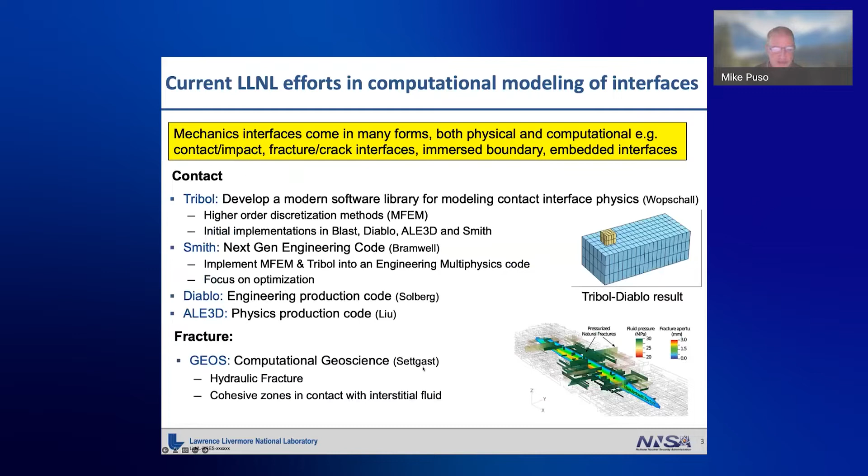One of our earlier immersed boundary codes was coupling our hydrocode Paradyn to Gemini, which is a Navy code, and there they use finite volumes in the background and then structural shells, and they're modeling blasts on ships.

The current thing over the last 12 years or so is we now have a production version of FEusion that has been used quite a bit over the last few years. It couples ALE3D, Paradyn, and the SPH code Spheral, and that uses cut cells in the background and couples with Lagrange multipliers, and I'll talk more in detail about that.

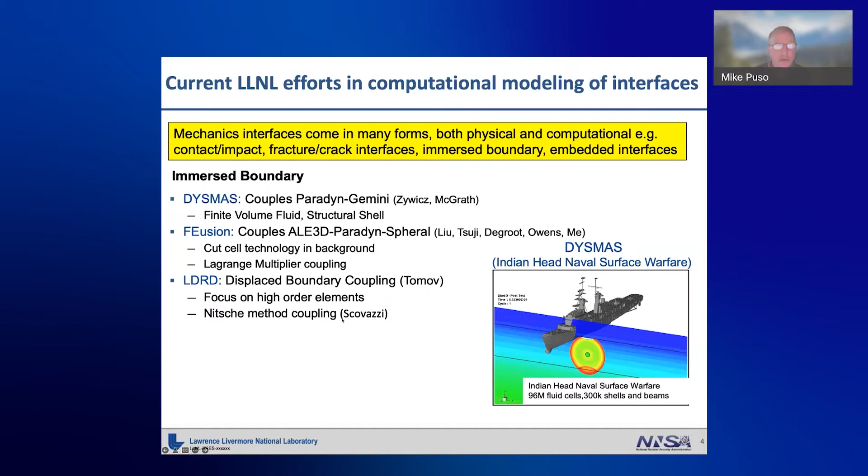Then there's an LDRD that's using this displaced boundary method that was developed by Guglielmo Scovazzi from Duke. The FEusion stuff in particular, we're interested in modeling like fracture or fragmentation.

So you have a blast going off. This is a grenade model by Chad Noble, and the HE gases basically project the fragments out, and you get a lot of contact with the fragments and so on.

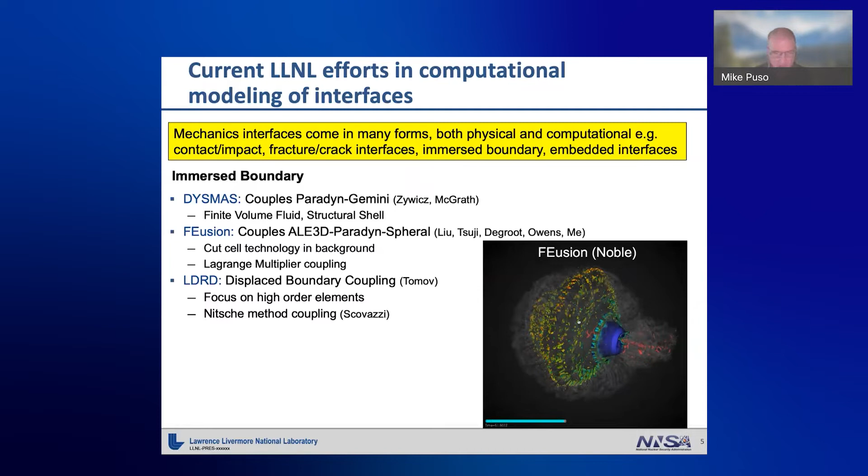With these interface methods, you have to come up with some sort of traction to enforce some displacement or velocity constraint at the boundary. There's three basic flavors for that: a penalty or a Nitsche method, or Lagrange multipliers, which we'll talk about today, which for a variety of reasons I like better than penalty, but I think more can be done there in the Nitsche world.

So in FEusion, we use these multipliers, but then you have to incorporate advection, and we're extended to SPH, and I'll go into some more detail about that.

The flavor of the day for contact, for a variety of reasons, because it's very smooth and has really nice behavior, is this Mortar contact. Unfortunately, it's biased. You have to choose a side, so you can't do self-contact problems. But we implemented two passes, and then we have to stabilize it.

So I'll talk a little bit more about that. Whenever you have contact gaps opening and closing, in an implicit time integrator in particular, it'll drive it crazy and go unstable if you don't do something special.

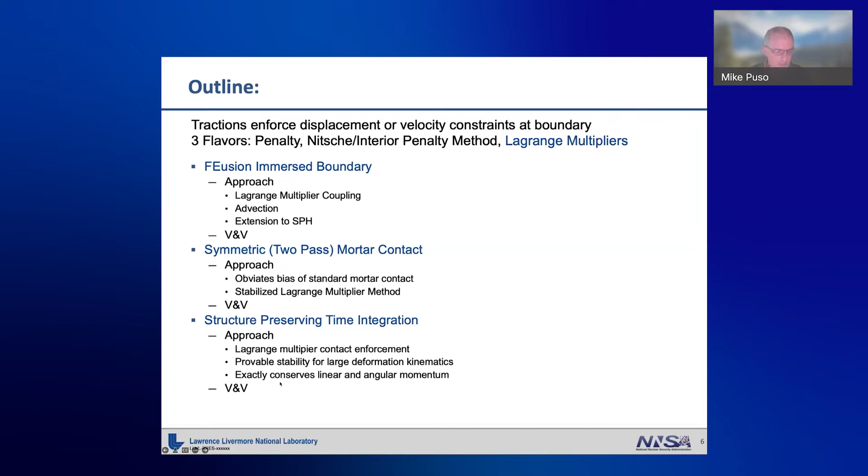In this case, we incorporate what they call structure preserving. It can conserve linear and angular momentum and energy, and I talked a little bit about that. So I'm going to occasionally delve into some equations, and I'll try to move through them real quick because not everybody has that much of a tolerance for that.

With immersed boundary methods, you have an overlapping discretization. It would be a solid on top of a fluid or another solid. You might have shells, and you might even have SPH particles sitting on top of the background. And that obviates this conforming mesh, which is very complicated to build. This is easier to build. This is the easiest to build, which is a shaped-in mesh. But then you run into problems in these mixed zones where you have solids mixed with air.

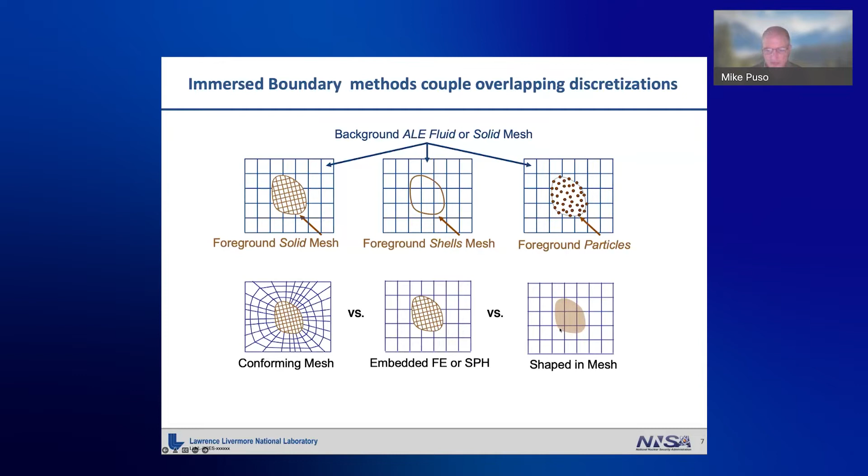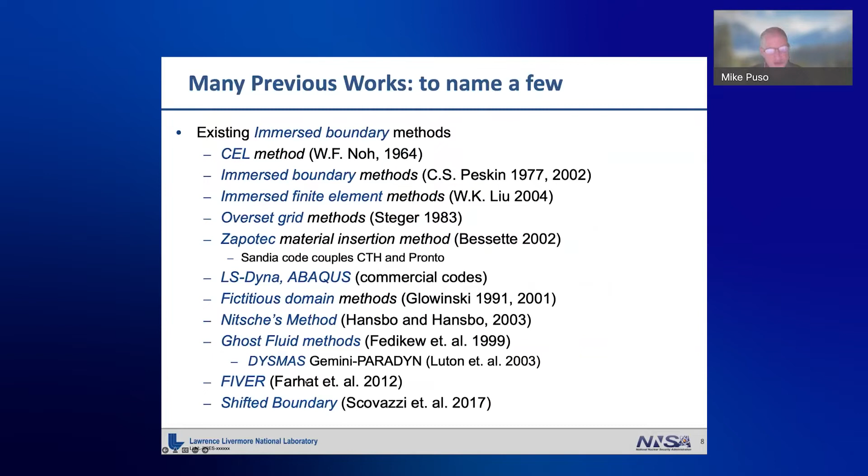There's a zillion different works, all started back in '64 with this coupled Euler-Lagrange method that was developed by this guy, William Noh, or Bill Noh, as they know him, who worked at the lab for a long time and came up with a lot of good stuff. That precipitated a whole bunch of other works because it's really powerful, and each of these different approaches has a different tact.

Our tact was, we didn't want to have a penalty method. We wanted to come up, we do most of this immersed boundary stuff with explicit time integration. We wanted to come up with a good way to characterize a time step that isn't affected by the interface.

So one of the issues we have to deal with is how to choose our pressure space. We have to solve for these multipliers. Unfortunately, we have to solve for that part implicitly. So there we have to look at the condition number of the system. And then, how do we get this time step?

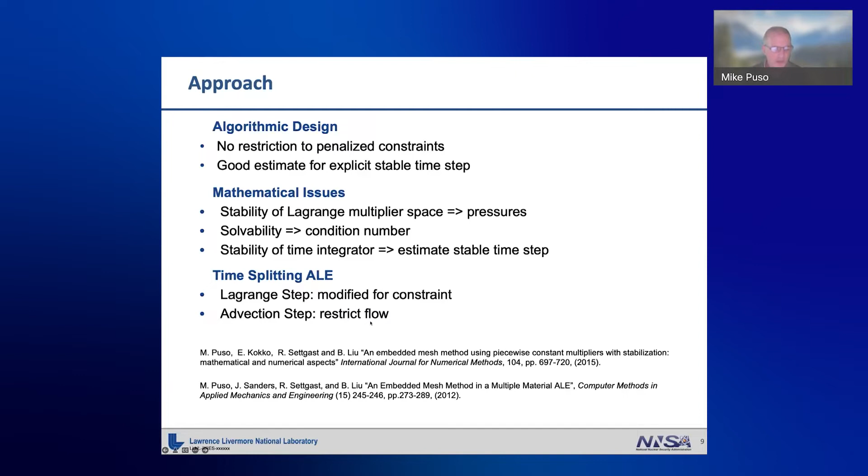Since we use a time splitting ALE, as most people at the lab know, you have a Lagrange step, and here we have to modify that for the constraint. And then the advection step, we have to restrict the flow at the boundary of that foreground and the background. A lot of the details are in these papers here.

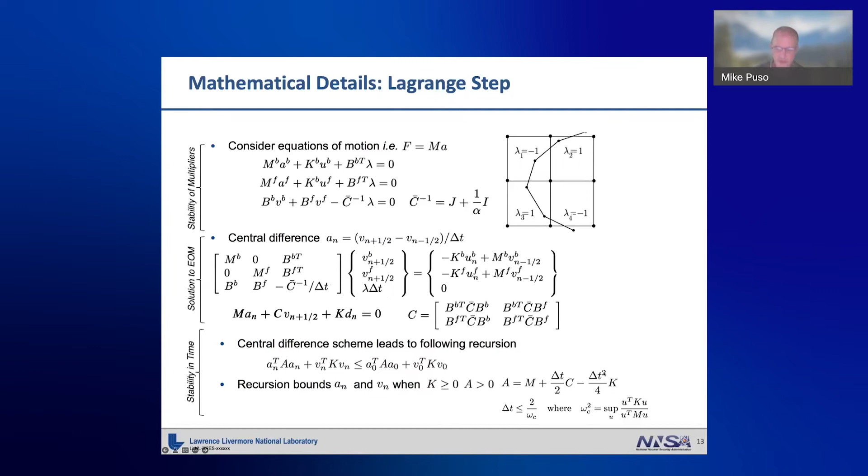So the worst element may or may not be at the boundary, and they're not slivers. So if you run these problems out long enough, you can get a static solution.

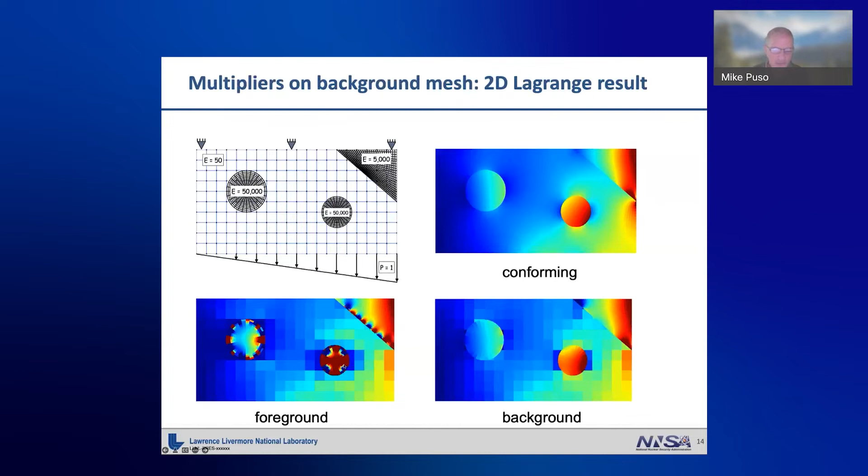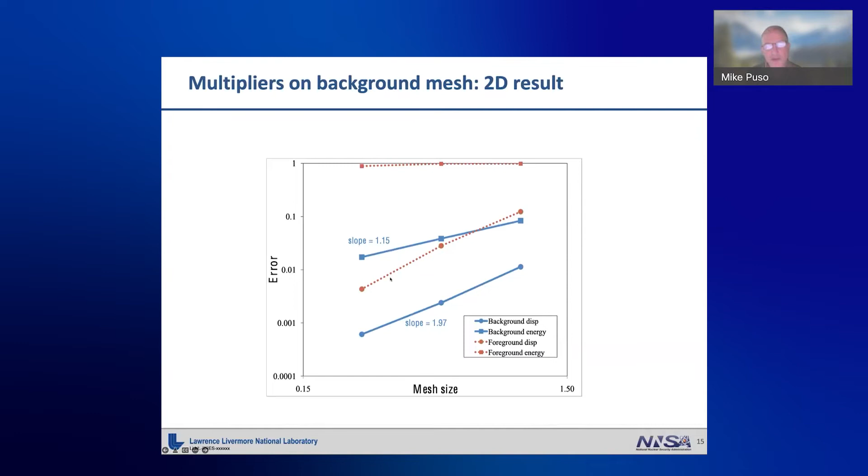So I have this stiff inclusion on some soft matrix, and this is a conforming mesh result. This is when you use unstable multipliers, and this is when you use stable multipliers. You want to look at the convergence rate for this, and you get the optimal convergence in the displacement norm for the stabilized one. This is the energy norm, and that's optimal. But you get this non-optimal result for the unstabilized case.

Now, how do I do the advection? It's again a two-step ALE we're using in the background, and we can also do it on the foreground, but here we're using it in the background. You have the solid mesh underneath, and it should be void. Here's a cut cell, and it has some material in it, Ve.

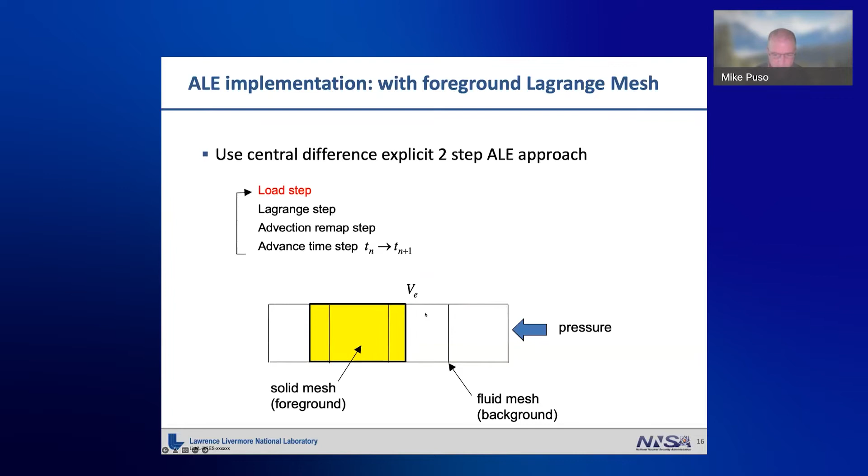I do a Lagrange step when I push on it, so the whole thing compresses together, and I enforce the constraint during that Lagrange step. Now I want to relax the mesh. When I relax the mesh, I get this volume flux from the right side, but I don't get any volume flux on the left side because I have what they call a PLIC, piecewise linear interface reconstruction, that says don't advect any volume flux at the interface.

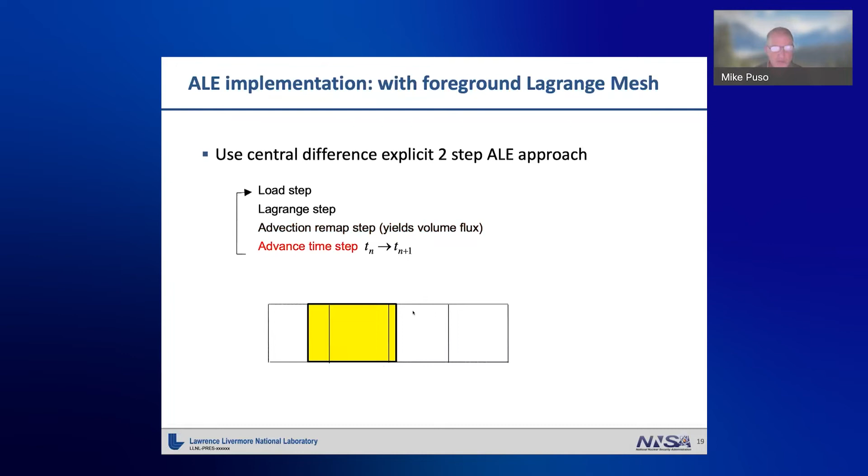This could be at an angle or anything like that, and the PLIC respects that. So then I move on to the next step and go on, and the whole time, the void should stay underneath there and nothing should leak.

So then we do some V and V, basically just comparing conforming to the immersed. Here I have a shock, a blast in this tube—it's a shock tube, you get a shock wave. We have tracers at intermediate points along here, and I measure basically the pressure at those tracers between the immersed or embedded mesh and the conforming, and it matches up at all the different tracers quite well.

Here's a buried mine. I have a mine in soil, and this is part of some work we did for the DoD for underbody blasts. The blast goes off, and then we model the velocities at points on the plate, and the dotted red matches the solid red for the embedded and the conforming, and the same thing with the blue, quite well.

And then here's a shell pipe. The blast goes off, the shell collapses on itself, as you see here. This is the displacement at a point in that shell, and for the embedded, you can keep modeling it indefinitely. For the conforming, it basically stops because you get a lot of mesh tangling in there—you can only do so much mesh relaxation.

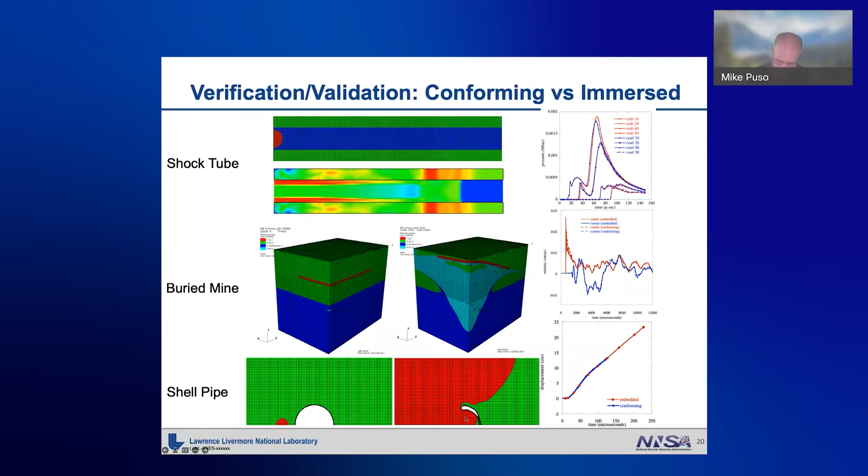So here I have two plates, and I have a fluid in between them.

I give them an initial velocity. They come together. When they pull apart, there's void, and then the fluid collapses inside the void, as you would expect. So when you look at the velocity of those two plates, say with the conforming mesh in red, the velocity slows down as the plates come together and squish the fluid, but then eventually stops because those elements get too small.

They shape these plates in, it comes, they hit, and then they basically get advection welding. They glue together because they're not going to have any elasticity to them. There's no contact. But with the embedded approach, they actually do contact.

Here we're using the common plane algorithm for the contact in ALE. It's a penalty contact, but it works well for this case. And then the plates rebound.

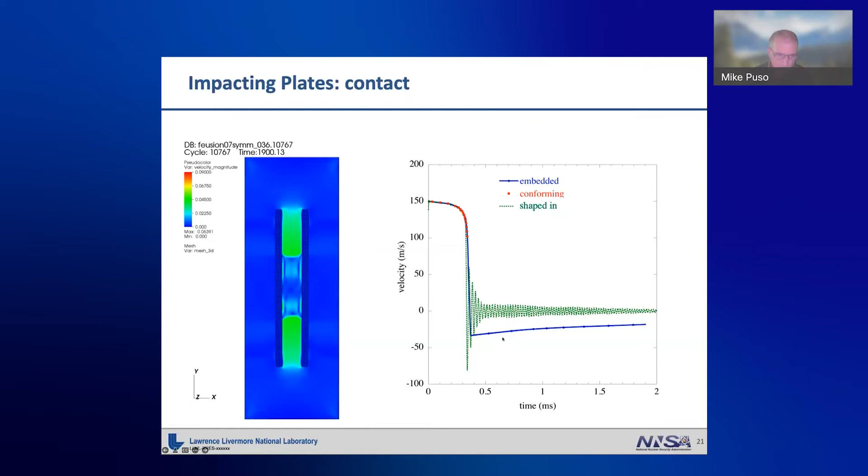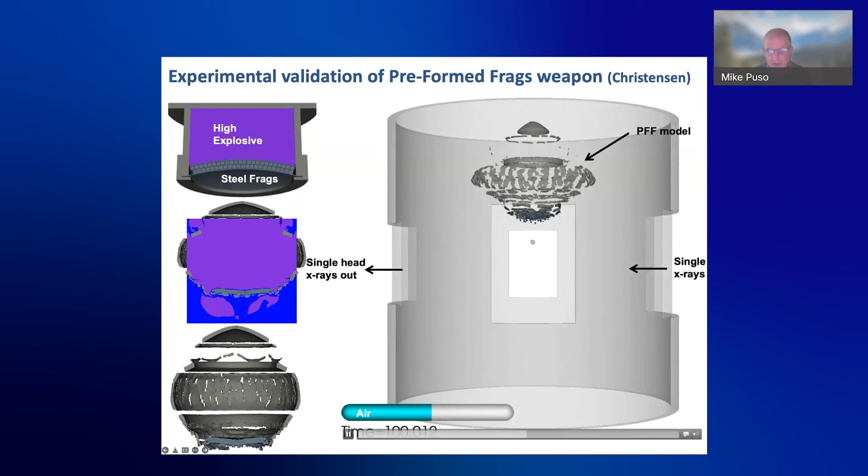Because we're going to want to model lots of frags, since this is what we do with this stuff, and these frags come in contact with each other. This is a V&V that John Christensen did. You have these steel frags and this HE. The blast goes off, it pushes these frags out, and they want to keep these frags as a clump. They built this apparatus to measure the velocities and the locations of those particles. It turned out to match pretty well - the results they were considering were within 1% of what they saw from the simulation versus the actual experiment.

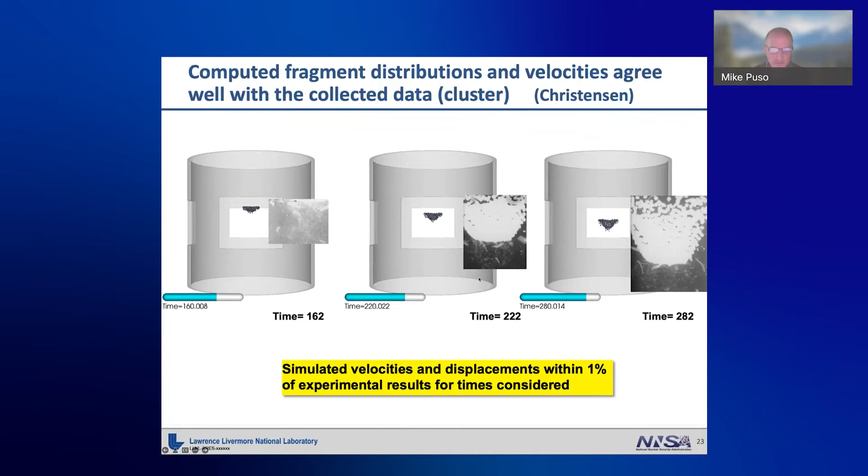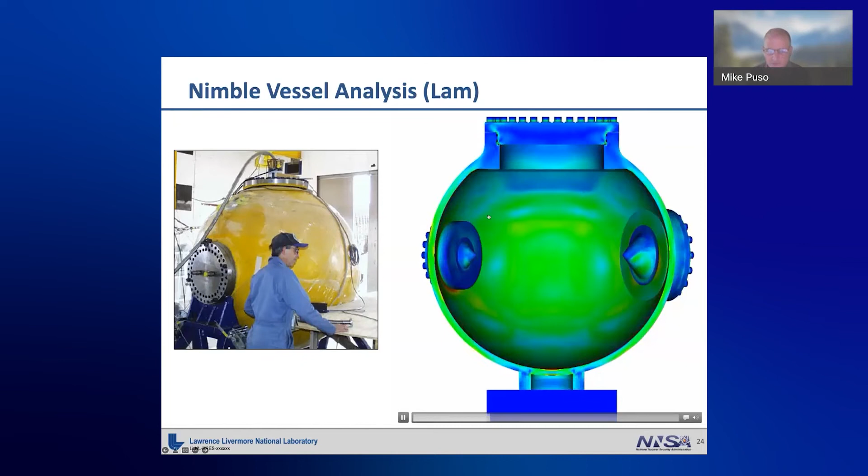Most of the work is actually finding where those overlaps are and then computing the weights. Turns out that solving for the multipliers isn't really hardly the cost at all, because that condition number is very nice - we can just use a regular CG solver. We don't have to use multigrid or anything because, again, the condition number is independent of h.

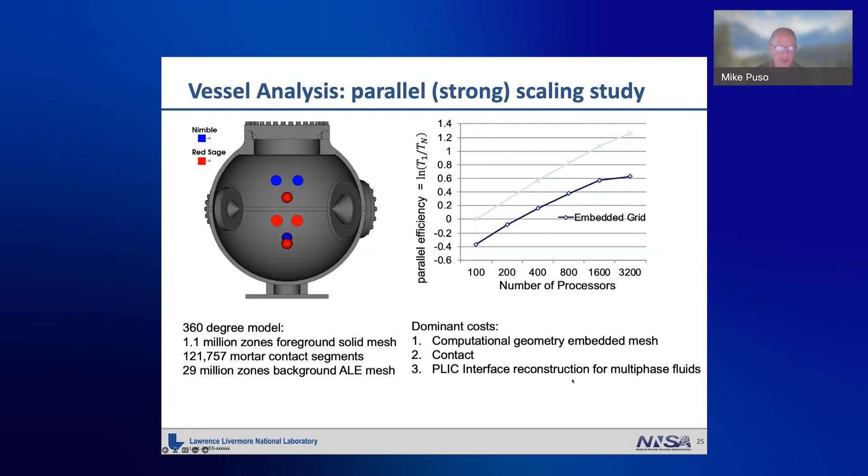And the contact and the PLIC are about the same cost. The PLIC is the interface reconstruction for the multi-phase fluids and modeling the advection near the foreground.

Now, with SPH it's just a cloud of points, or particles. They basically communicate with each other using these kernel functions, which are smooth functions - circles or ellipsoids in 3D.

Now we need an airtight surface to couple the background to the foreground. The way we get one is we identify points in the background that live underneath these kernel functions. Then for cells that are going to be cut, because they have a red dot and blue dots in them, we put, say, triangles or tets, and figure out where these kernels cut these edges. For 3D, we put in triangles at those locations. Here we put lines and connect the dots.

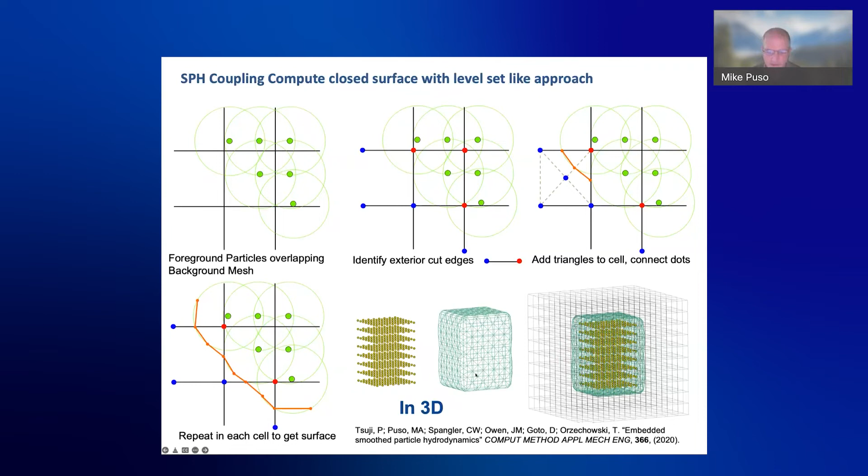Here's a result in 3D. So we have this point cloud, immersed in this grid, and this is the triangular mesh that we produced out of that using this algorithm. All this SPH stuff that I'm presenting is in this paper from a couple of years ago.

The coupling is very similar, except we calculate the forces instead of using finite elements - we just use SPH. The SPH calculation for forces depends on these particle-to-particle force calculations based on the stress, and these are the masses, so you get what looks like the same equations of motion. These forces live over here, and I still have to calculate these multipliers to enforce this constraint that I just built along this edge.

The background forces are computed the same way, using finite element shape functions integrated against the pressures. But the foreground is different now. I don't have finite element shape functions for those, but I can create some and use virtual work to do the coupling for the SPH and the background. They have to be bigger than the kernel functions so they intersect the surface. I use the kernels, expand them out, and weight them to make them a partition of unity. That's how we do the coupling.

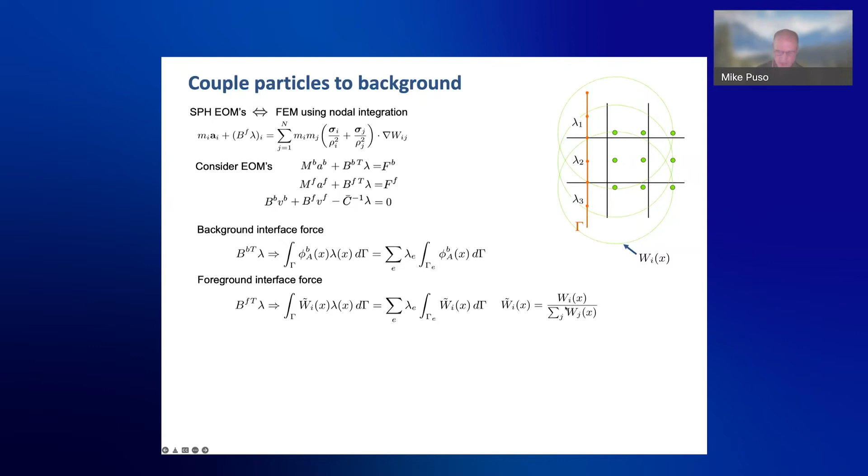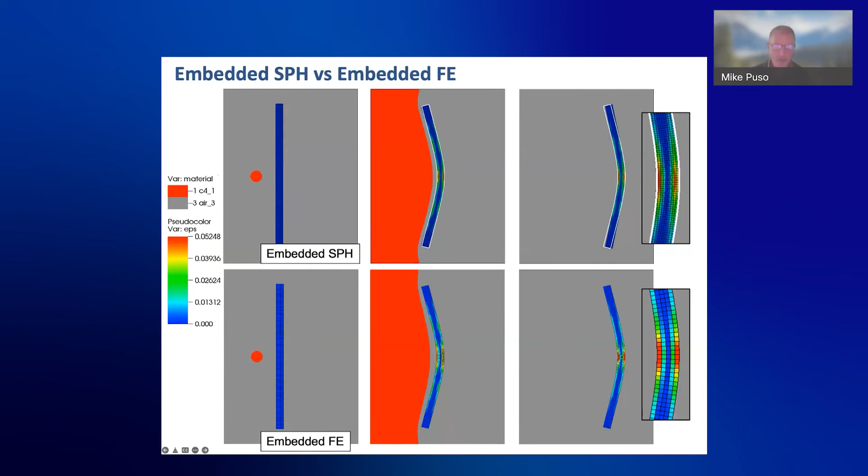Here we have a blast that goes up and hits this SPH beam. The beam flies, and it compares well, about as good as you can get with SPH, since it has some accuracy issues. The plate flies and compares well with the immersed boundary, and the immersed boundary compares well with the conforming mesh, so everything's good in those cases.

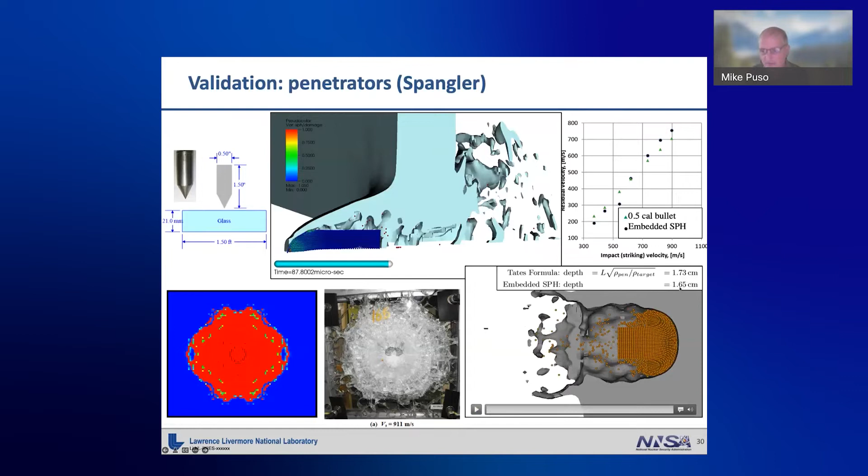The analytical solution for the depth is that, based on those densities. This is what we get, which is less because we do have some strength in the problem. And then some results from V&V that Paul Tsuji did, where you have the cylinder with HE inside it.

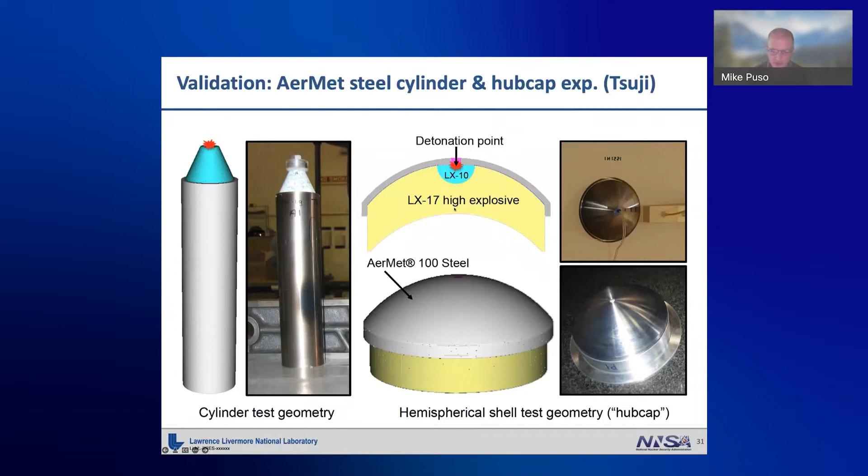We also have a hubcap, the steel cap on top of some explosive, and we do the comparisons. Here's some results from the cylinder. What ends up happening is these SPH particles get far enough away from each other that the kernels don't touch, and the gas can jet through, because when we're building that airtight surface, the particles can form gaps.

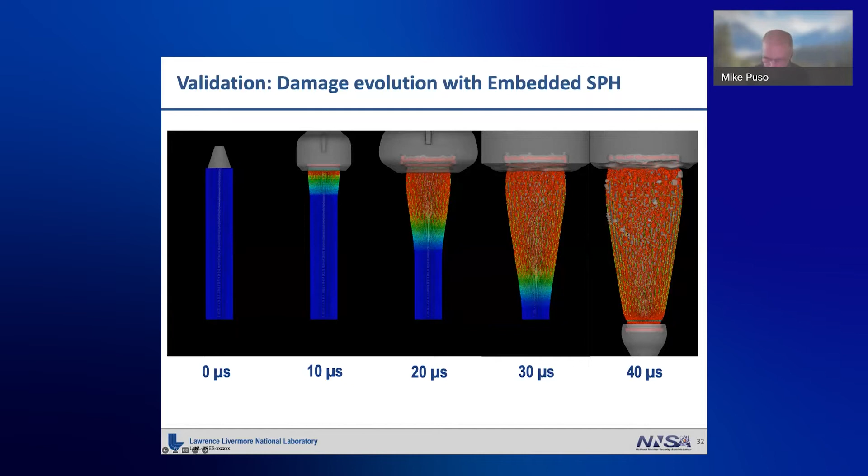And there's a result, compared to at some particular time. Qualitatively, it's all right.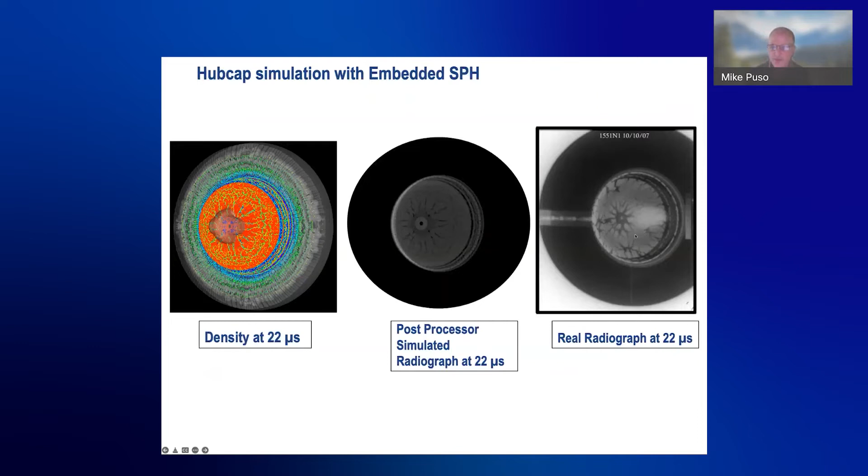Here's the hubcap. You can see sort of these radial cracks. This is from VisIt, you can get a radiograph. Paul did all this work. And this is the actual radiograph, which qualitatively is pretty good. But actually, the results from the probe look really good.

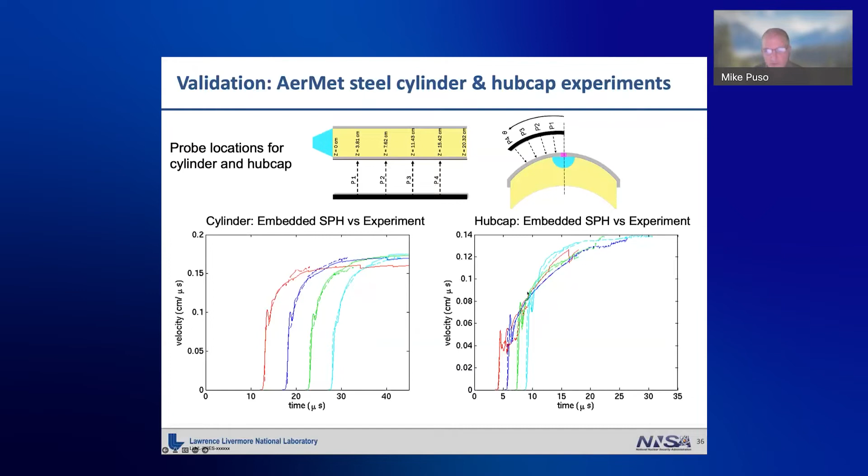You have these velocity probes along the length and along the circumference, and the simulations match quite well for the range we have. Same thing here, with all the different probes for the hubcap. It's pretty good for the cylinder, not quite as well on the hubcap. There are some things we could probably look at to improve.

So here we've incorporated friction and unilateral contact, so gaps can open and close. Here we have this rebar, and this is concrete, compressed by some plates. This is the damage that results as we apply a force to pull that bar out. You can see backfill basically from the concrete into the gap that's formed.

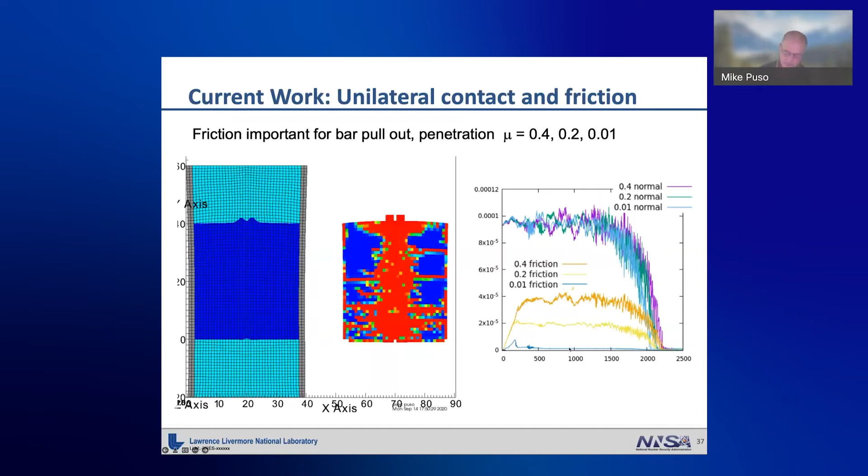This is the normal pressure along that bar, and for different Coulomb coefficients, the normal pressure is pretty much the same, then drops off as the bar leaves the concrete. This is the friction at the different levels: this is 0.4, this is 0.2, about half of that, and then this is hardly any friction. We have some more V&V to do with that.

But now with contact problems, well, where we live, they're all dominated by contact. Engineering problems are dominated by contact. This is the only thing I can show, which is a transportation container. You can see there's lots of surfaces, and they're always concerned about the bolts. We put all the contact in that.

There's lots of versions of constraint enforcement, but the traditional one people use most of the time is still node to surface, where a node can't penetrate a segment. From mesh 1 to mesh 2, and then you flip sides for the 2 pass. This node can't pass through the mesh 1 segment. Now, particularly for implicit contact, people are using surface to surface contact because it behaves better.

And so for mortar, you pick a pressure field on one side. And so when you run a patch test, just apply some uniaxial stress on these blocks. The single pass does terrible for the patch test. The double pass does better than this, but it's not perfect for 3D anyways. And for higher order elements, it doesn't work even for that at all.

But the surface to surface works pretty good. In fact, it's perfect for this problem.

And so if you have, say, pressure, I have this beam as a sandwich beam. If I put enough pressure on it so that the contact stays active on this interface between the two beams, put a moment on it, you get, ultimately, this curved result.

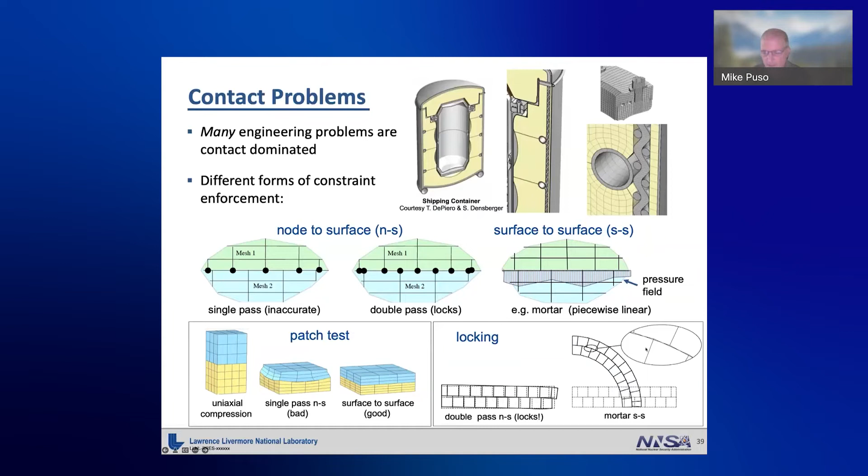But again, the problem is you have to pick a side for the pressure, so you can't do this self-contact problem. Segment-to-segment approaches aren't biased, but they're typically not stable, though they still work for penalty methods.

So, like common plane, you have these segments, and you put a pressure on them. In this case it would be a penalty pressure, but you could do a Lagrange multiplier pressure. And so each segment you can put a different pressure on it, say piecewise constant.

Problem is, under certain symmetry, you can have this plus, this high-low pressure on the segments that result, or a low-high.

And since the forces at these nodes is just the average of these pressures, you're going to get the same pressures in the purple forces as you do in the red, which means I can't control that pressure. That thing could just show up.

You won't see it so much with penalty, but you'll see it with Lagrange multipliers.

Problem with two-pass mortar, and this is what we're going to fix, is now I'll add another pressure on top. But there, if you don't stabilize it, you can get a small pressure on top and a big pressure on the bottom, or a big pressure on top and a small one on the bottom. And again, the contact forces that result are the same, so I can't control that.

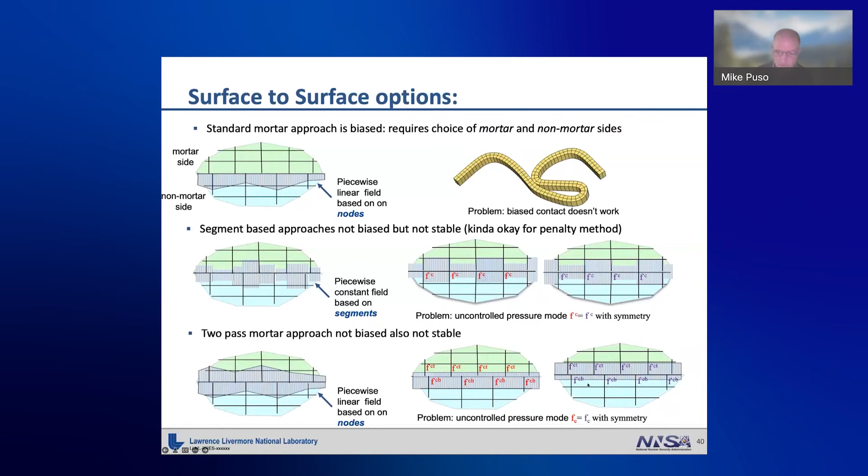So that's what I'm going to do. So here's my shape functions. I model, I interpolate my displacements using them, and I'll also interpolate the tractions with it too, and a nodal traction is based on some scalar traction and some nodal normal that I choose.

I have my test functions for displacement, and I also have a test function for pressure. And so when I put this into my abstract boundary value problem, I get these contact force terms. This is the energy, and this is my constraint term.

Again, energy looks just like this, based on the strains. And constraints basically are the test functions for the pressure integrated against the jump in the displacement.

And so when you put in the nodal quantities for this, you get a discrete form that looks like that, which gives you a nodal gap for every node on the non-mortar side that involves the nodal normal and again the jump that's integrated against these test functions, and that's the weighted least squares gap I was talking about.

The contact forces come from the trial function pressures integrated against the test functions, and then this is the discrete form of that with the nodal quantities, and then you get nodal forces from that. You're going to get a system of equations that looks like this based on the stiffness matrix, and these are the B matrices that basically give you the contact forces you see here.

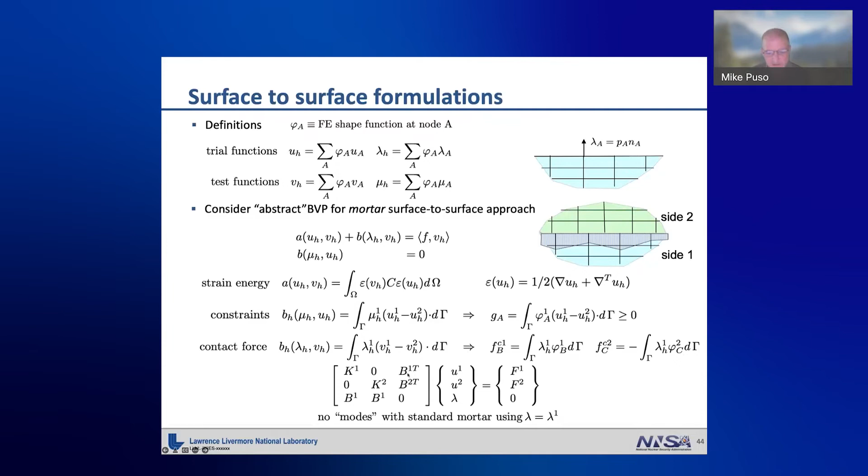And again, if I use the regular mortar method, I'll just use one pressure from one side, and it turns out these B matrices, the columns are linearly independent. So the pressure is going to be unique. I don't get a mode. But with two-pass, these are linearly dependent, and so I have to fix that.

So the way I fix that is I put in, just like before, this stabilization term J into the abstract boundary value problem. And now again, I'm using two pressures on both sides, and the J basically uses gamma scaled by h to penalize the jump between the pressures on both sides.

Now these are both oriented positive and negative. So basically, I drive this guy to 1, and I drive this guy to -1 to make them the same, because again, the sign is opposite.

And so I want to keep them close together. By the way, that looks like it's biased, side 1 and 2, but I don't really need to pick a side 1 or 2.

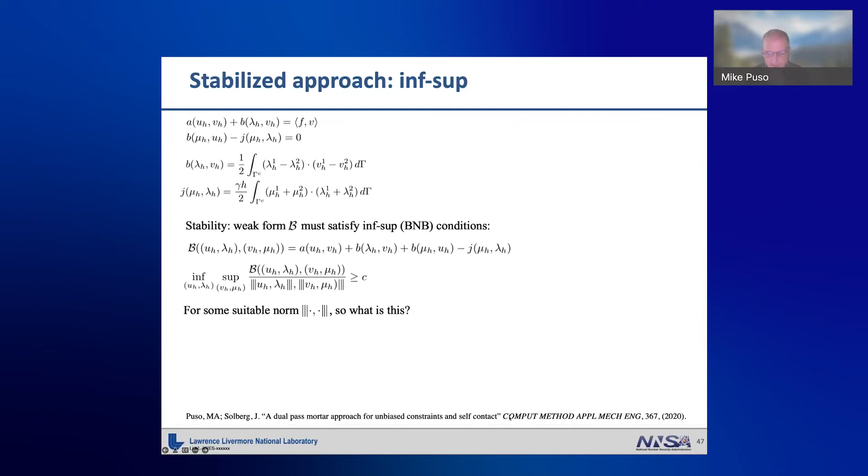So the question is, though, what norm are we going to use, right? Again, all this stuff's in this paper from a couple of years back on all this. And so the way you pick your norm in this case is you make sure that whatever norm you pick will bound this bilinear form from above.

And it turns out that, basically by squaring pieces that are in that thing, obviously I'm going to get the H1 norm for this guy, right? But these other guys are weirder.

So if I square lambda in here, what I'm really going to get is a fractional norm, a trace norm, which is the -1/2 norm, but I'm going to use what they call mesh dependent norms. And this guy's even weirder for the displacement. It's the L2 projection of the gap. I'll talk about that in a second too. Here's the gap. It's the L2 projection that shows up in this 1/2 weighted norm.

So this is everything. This is a review. There's my bilinear form. There's my inf-sup condition. There's my upper bound. Here's my norm. And what I want is to use this ansatz, this set of test functions, to show that this guy up here, my bilinear form, is greater than c.

That's job 1. This is the breakout of all these terms here. And what I'm going to do is play the game where, okay, I know if I pick a test function that uses my trial function in here, that's going to square this guy, okay? And that's good because that's a positive term.

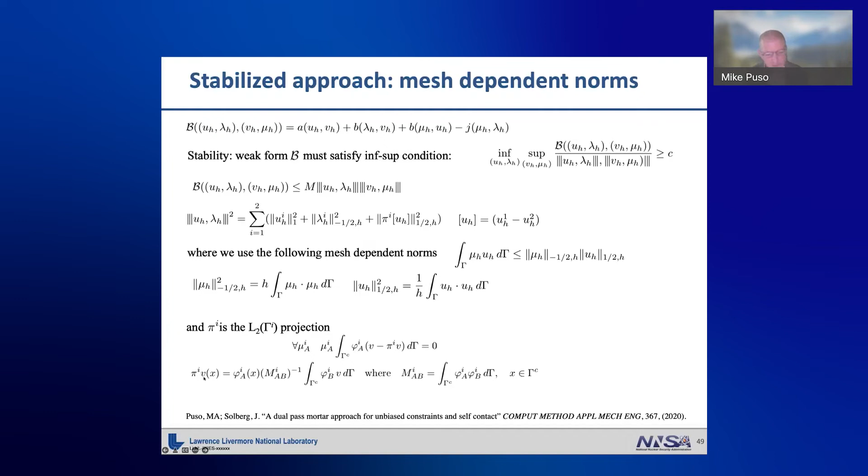And then the L2 projection is just, I have some function v, which is L2, and then I basically do a least squares solution which gives me this L2 because I project both against the shape functions, and I come up with this L2 projection based on this mass. So back to here. Sorry about that.

We already showed that term squares and that term squares. I've got to make beta small so that the cross terms go away.

Here I put in my L2 projection, squares that term, but again I have to make alpha small using Young's and inverse inequalities. And then this term squares that term, which makes that positive, and I've demonstrated my bound, my inf-sup condition.

Now I want to come up with an error estimate. I have the exact solution for the displacement and the trial solution for the displacement, and the same for pressures. I use my triangle inequality, and when I want to figure out what this term is, I can use my bound, because that's what the inf-sup condition did.

I can replace it with the bound, and this is the lower bound for that bilinear form. Now, if you remember from your finite element class, if you had no constraints you have the energy, you can show that the energy of the error is zero - it's orthogonal, it's a Galerkin orthogonality.

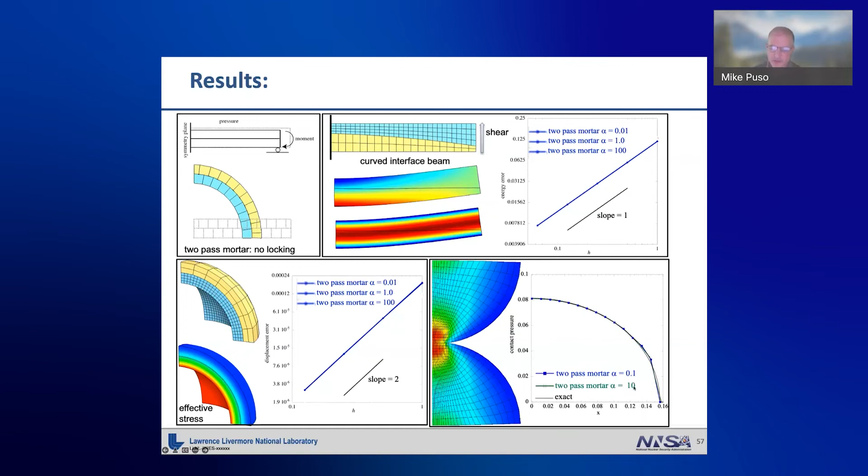I get the contact pressures, and this black line is exact, and I get very good answers for this range of alpha. And then here's some nonlinear problems, so I have some hyperelastic rubber here, and some plastic material for this cylinder buckling. This looks like an easy problem for an explicit code, but it's definitely not for an implicit code.

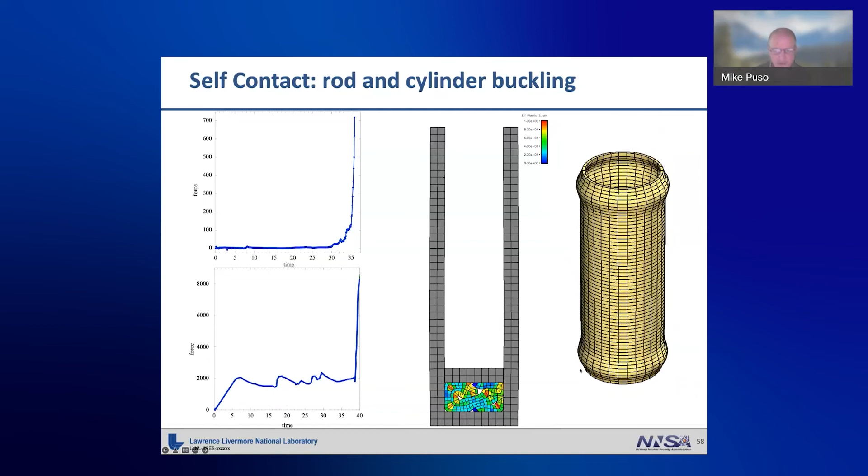What ends up happening is I load this rubber column, the force goes up as this thing basically gets compressed into a ball. And here I have these lobes as I push on that cylinder - these lobes are basically little buckles, and as these buckles start to coalesce they get stiffer, and then I form a new buckle, and so on and so on. Once it gets down to the bottom, it's very stiff. So again, not an easy problem for an implicit code.

So I couldn't do that with my regular code. Here what I have is this rubber beam - I give it a push, so it's translating and also rotating at a relatively good rate. Just using Newmark's trapezoid rule, which people almost always do, it doesn't work for large rotations. Basically, a lot of these time integrators are unstable for these nonlinear problems. This would be the velocity at one of those nodes - it just eventually goes crazy.

Here I have a block which I give initial velocity that's basically in between two other rigid blocks, and eventually using Newmark's method, it just goes unstable. This is a linear material, and it goes unstable very quickly.

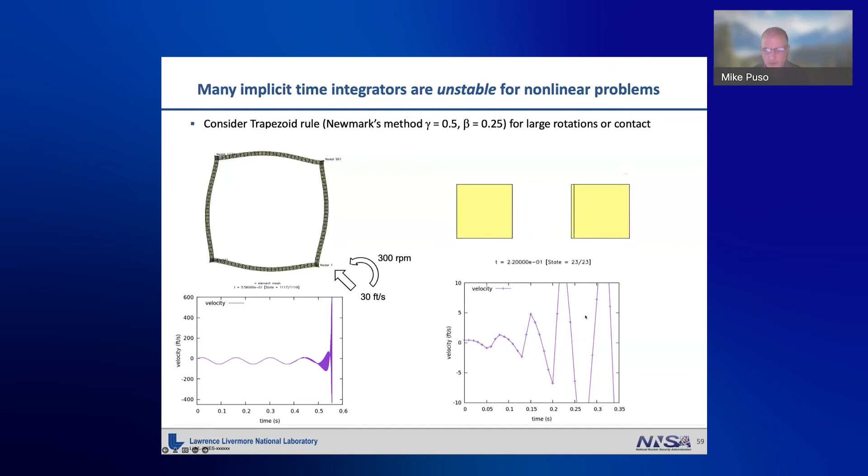So to fix all that, we're going to use these structure-preserving time integration schemes, and they're second order. A higher order scheme, in fact, may not be able to conserve anything - they may work better, but you can't prove as much for these nonlinear problems. It turns out these are good for long time events.

So you can enforce discrete energy momentum, or you can do symplectic time integration schemes which conserve this phase space of the energy. So the equations of motion we show here - these are the internal forces, these are the contact forces, and using a mid-step time integrator, basically the displacements in terms of the average velocities.

And so if I take these velocities and multiply them times this inertia term, I basically get the difference in the kinetic energy. This is the mass matrix - it could be a consistent mass matrix, for instance. And I take this and multiply it times the forces, and I get basically what looks like an energy term - a displacement times the force. You won't get anything like this with Newmark's method.

So computing the internal forces the right way - this is the second PK stress - if I compute it based, for instance, for the simple elasticity model, on the average of the Green strain. I can use other material models, but you have to do them the right way.

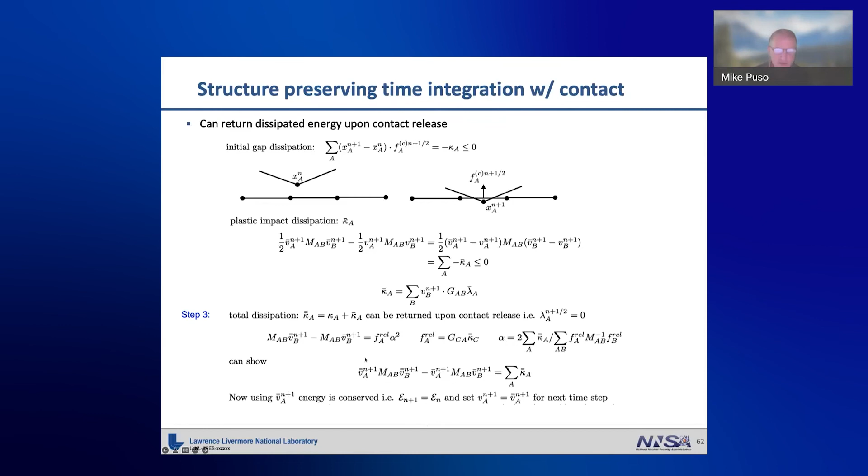So now I combine that problem I had before where I had these rubber boxes, and I'll put a new rubber box in between. I'll give this guy a kick, and basically he hits the other box inside there, and this thing bounces around 1,000 times.

And I run it out for 20 seconds, which you can never do in an explicit code. And what I show is, the total energy is conserved over the whole time. The kinetic energy here, shown here, the internal energy is here. This is for the fully conserving version, where I give all the energy back.

Here I'm giving the energy back, but I have friction, so that's going to give me some natural dissipation in the total energy. Here's the kinetic energy, and they go down rather slow.

But with the plastic impact, you can dissipate a lot of energy. And in a lot of systems, you really don't know how much energy you're going to dissipate. And you can pick say a coefficient of restitution that may give something back in between here and here.

In fact, that's how everybody always solves all their problems. When they know they have damping, they tune it.

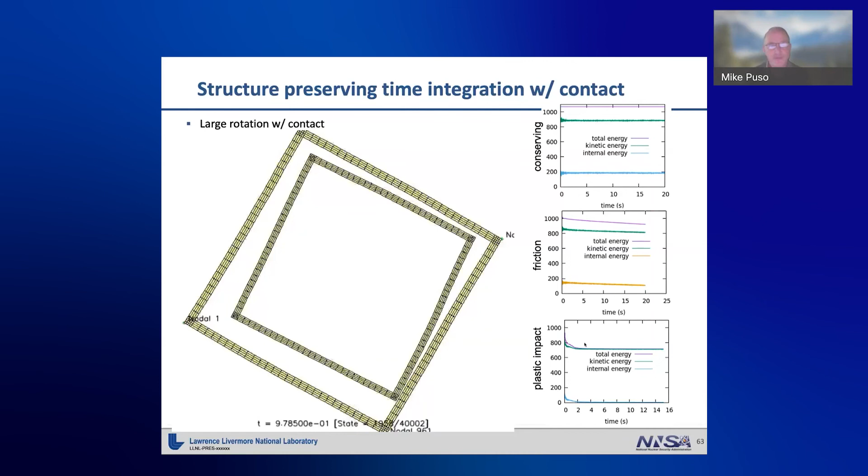And what ends up happening is, as you run this thing out long enough, out to say, like I said, 20 seconds, that one box finds a corner and it just sticks in there. For the conserving version, it kind of wiggles around in there, but for the plastic one, it just locks right in.

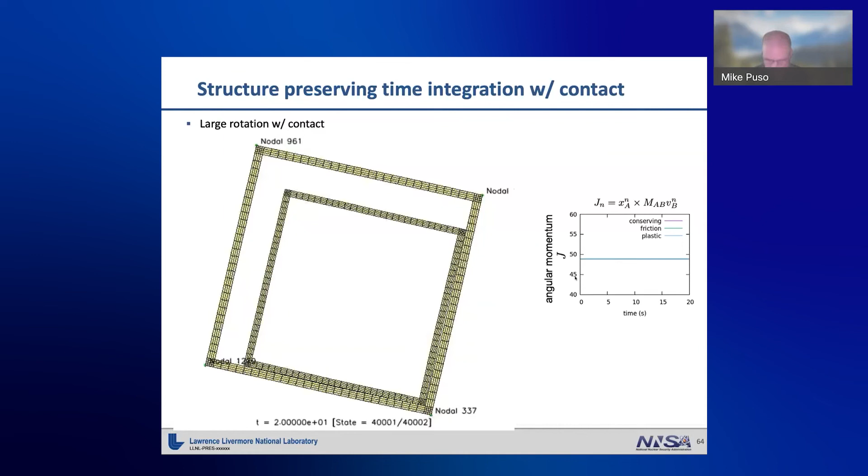But meantime, even though you have dissipation, the angular momentum stays constant. This discrete form of angular momentum stays constant throughout the whole time for all these different cases. So that's what you want. So if I got some space vehicle or something like that, I don't want this thing to stop rotating or go rotate into some weird phase because I can't conserve that quantity.

So to sum things up, we developed this immersed finite element approach called fusion that couples AL and SPH. We use multipliers with stabilization to do that, and a special advection technique. We stabilize the two-pass mortar contact so we can do self-contact. And then we come up with a structure-preserving time integration for the contact that makes it stable for implicit time integrators.

Now what we're working on is a GPU port of fusion, and these folks are working on that, and then a GPU port for Tribol, and these folks and others et al. are working on that.

The domain decomposition for slide world, which is also really fusion world too, is where Ben Liu and Eric Chin and Kenny Weiss are working on that. Some of that's done for the blast code, but it's not done for the implicit side.

We're currently working on topology optimization with contact with Lido, Smith, and Diablo, and we have a paper out from a couple of years ago on that. One of the interesting problems that they're trying to model there, Todd Weisgraber is trying to do for additive manufacturing, is the size of these nylon plies, but they're all in contact like these Lincoln logs you see here. And there's a lot of contact. It's a very hard problem.

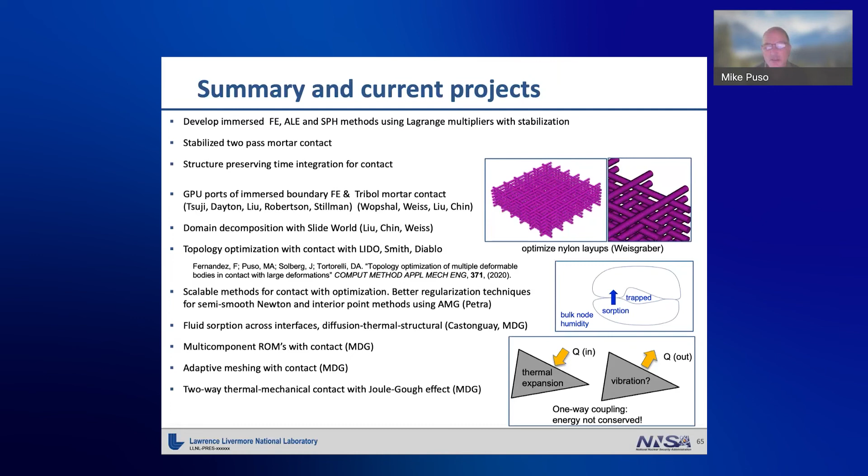I do have a question. This is Cosmin. Can you go back to the slide where you use that J as a regularization for the contact problem?

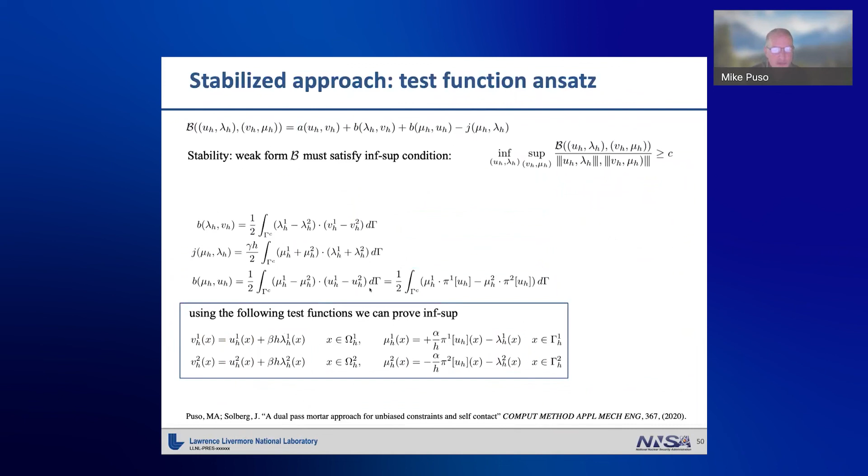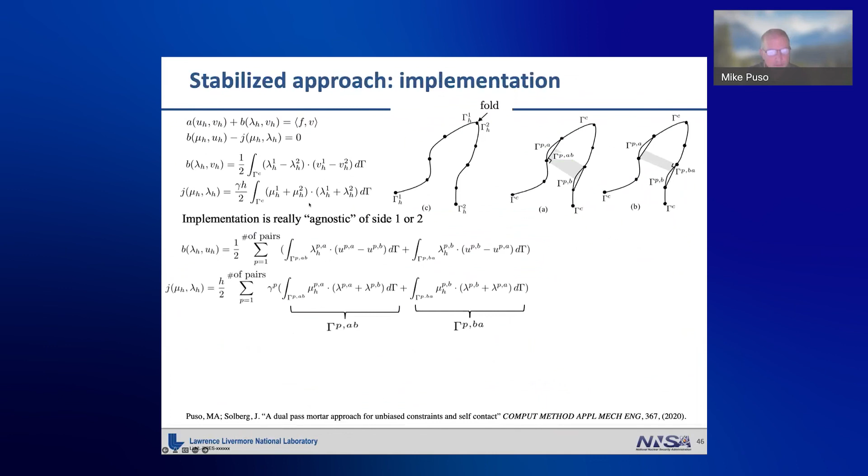Right, this. Yeah, oh no. Yeah, that one. This slide, or where you also introduce mu on top of lambda. Like here? Or earlier? I think it was slide 55. 55, oh okay. Okay, there. All right, oh maybe not. Maybe the next one. There? Right, this one, yes.

Out of curiosity, why can't you just solve the system with the 2-2 block, and why do we have to do this? The problem with that is you can't use augmented Lagrange for that, for instance. You need a zero in the bottom block to do augmented Lagrange. Oh right, okay, I see it. Yeah, because in fact a lot of solvers might want that zero there too.

But yeah, it's that J block, it really needs a regularization. So this J block right here, this isn't good, but you can stabilize this J block if you really want to use this for the solution. And it turns out you can stabilize this J block and still get this if you know what eigenvector to stick in there. And we sort of do know what, so if you stuck the one eigenvector in, because basically this thing is positive semi-definite, so yes, that is a problem there. But if I stabilize that by incorporating another eigenvector, which I know, I can make this invertible and still satisfy this.

By incorporating another vector, you mean adding the identity multiplied with the eigenvalue? The identity would work, and you can get that, but you're not going to get this back, it'll still be good. If you added, say, a block of ones, just all ones, because it turns out the constant passes through this thing — a vector of ones passes right through. So that means that's my eigenvector that it's missing. I can basically do an outer product of that eigenvector and add it into this, stabilize it, and still satisfy this system because that eigenvector doesn't live in this range space. Thank you, that makes sense. It does, yeah, thanks.

It looks like Jerome had a question or a comment. He says one thing that's interesting to note is that the dissipation is necessary to avoid chatter — you can't get rid of the chatter by reducing the time step. And he gives an example of two rigid bouncing balls, that you have to conserve the energy by making the balls bounce without dissipation.

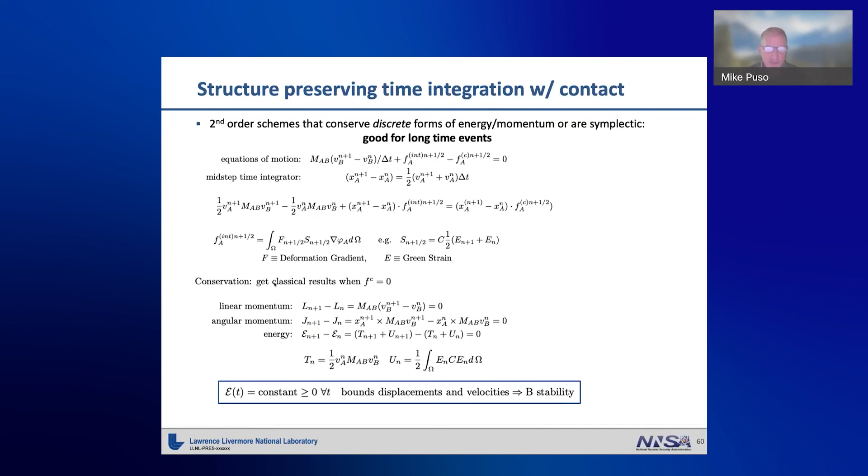Yeah, I mean that's what people end up doing — to get rid of the chatter they add dissipation, but the dissipation ends up killing the problem, and it turns out it can still go unstable because you don't know how much dissipation to add, and there's no guarantee. So if they use the Newmark method with dissipation, it will still go unstable. I didn't show an example of where you get the chatter, but as you can see, the chatter is controlled by this here. And again, the nice thing about this is it's a linear problem — it's a linear problem that I do after I solve the nonlinear problem.

Any other questions for Mike? Sure. First of all, Mike, thanks a lot for coming and presenting. This is so much impressive work. It's a bit overwhelming, I will admit. You guys have really done a lot of things. It's basically 3 talks all smushed together. Yep.

We absolutely wanted to broaden the seminar to include a lot of engineering perspectives like this one too. So going back to, can you go back to slide 56, the one that Cosmin was discussing? Yeah, sure.

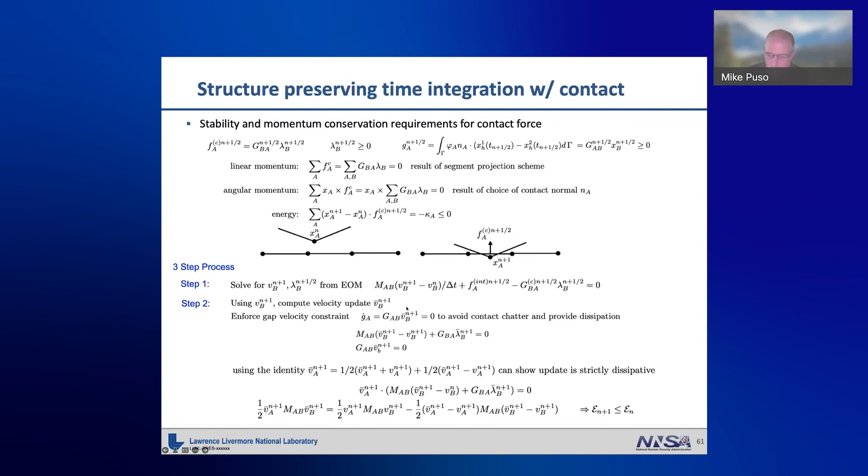Regardless of which exact formulation you have, with additional stabilization on that, you have a pretty complicated system. Did you mention how those systems are currently being solved? Right now I'm just using a direct solver, and the direct solver still has to pivot because of this term. It's not positive definite. It works, but it doesn't do exact pivoting for the big parallel distributed memory case, because it's really hard to do exact pivoting in distributed memory parallel. So they come up with an approximate type form of pivoting. That's the reason why I don't use this very much right now.

Even these direct solvers kind of gag on that when they're big parallel distributed memory solvers. The ones that do full pivoting work fine. So this doesn't get you out of the woods as far as solving an indefinite system goes. That's the issue. Right, okay, I just wanted to clarify that.

Yeah, can I ask a question? Yep, okay, absolutely, all right. So this slide is fine. I was just wondering, because you have the second equation, the small b minus the small j, and the small j is like you're adding something together, if I remember correctly the definition. It's like an average on the two surfaces.

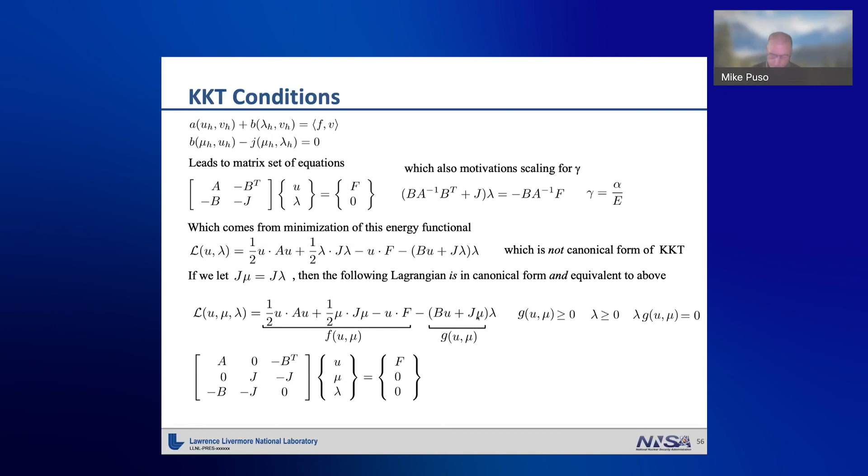Well, the form of J was basically, as I mentioned, if you just look at this as an energy, this would just be, say, after the variation, these are test functions. This would just be lambda 1 plus lambda 2 squared. That would be sort of like the energy term from this thing. And so when you take the variation of it to come up with the equations, the first variation, the gradient, you get these test function terms.

But basically this guy is keeping these lambdas close together, because of the gamma. And like I said, it's more obvious when you show it in the form of energy. But this doesn't have to be this exact term, it can be some other form. You could have cooked up a different term. If you're using a different type of surface to surface approach, you're going to use a different term. If you use that piecewise constant segment approach, you'd have to stabilize the pressures a different way, say stabilize the adjacent pressures. Either way, you're going to land with some stabilization term.